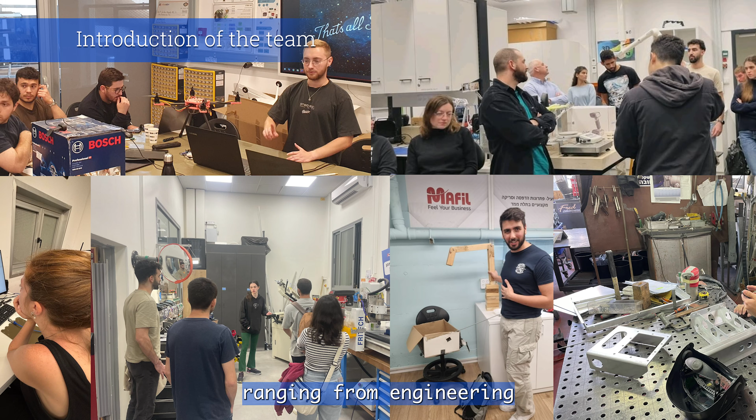This year, the team is composed of around 50 members from various degrees, ranging from engineering to applied sciences and health sciences. To work as efficiently as possible, we have divided the work between 10 subdivisions and assigned clear roles to everyone. Each subdivision is composed of a team lead and 2 to 5 team members, with a member from the industry to help with advice and guidance if needed.

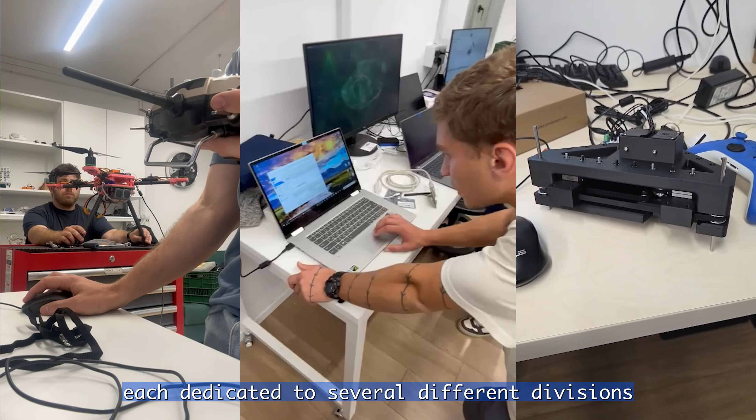Above the subdivision team leads, we have 5 system engineers, each dedicated to several different divisions and the integration of the systems as a whole. In the management side of things, we have several key members who partake in different roles such as marketing, industry relations, logistics, and more.

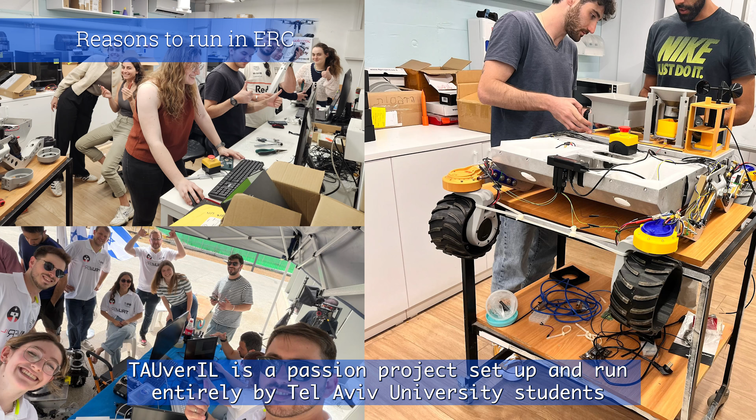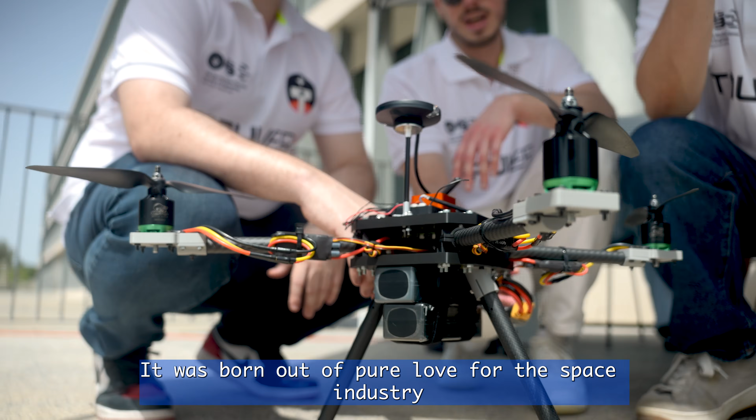TAUverIL is a passion project set up and run entirely by Tel Aviv University students as a way to grow the future generation of engineers and provide them hands-on experience during their degree. It was born out of pure love for the space industry and a passion to promote it in Israeli academia. Our close relations with both the industry and academia provide our students a way to launch their future careers with built-in knowledge. We chose the ERC specifically as we aim high.

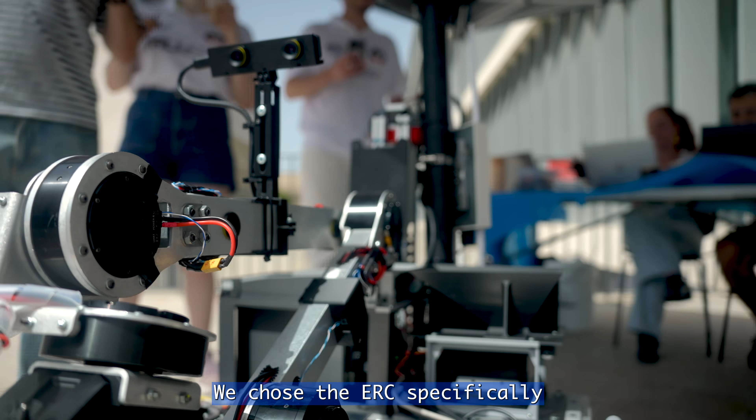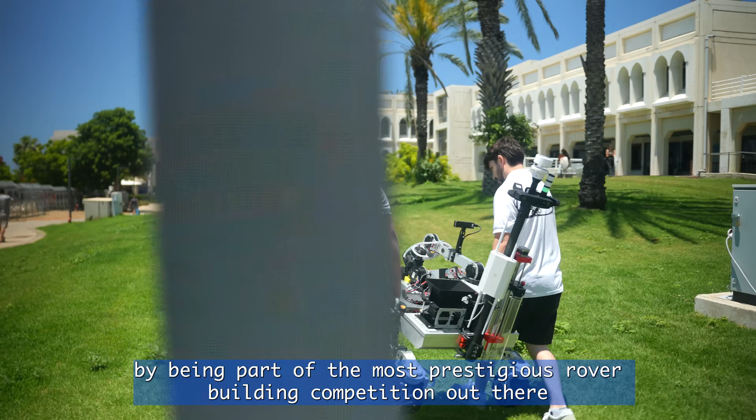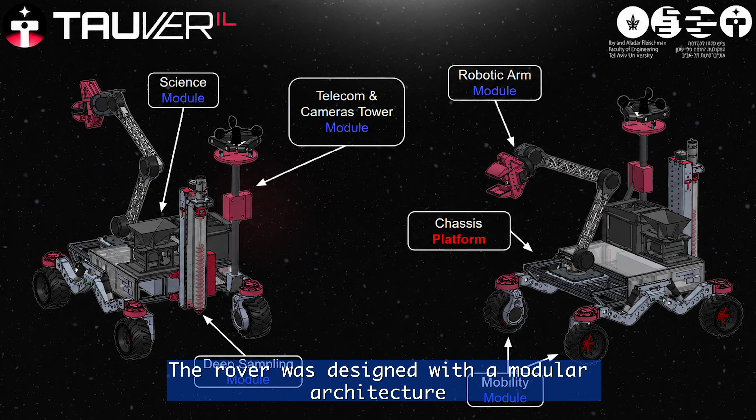The rover was designed with a modular architecture based on a main chassis platform with replaceable modules, where each module is a subsystem by itself. This allows us to change configurations between missions and also upgrade the future systems without redesigning the entire rover.

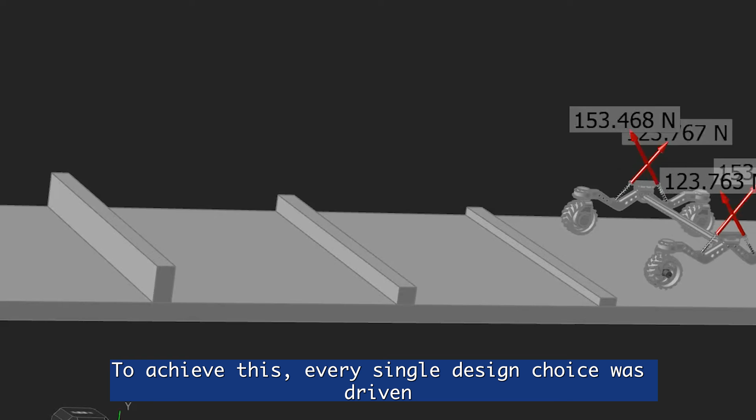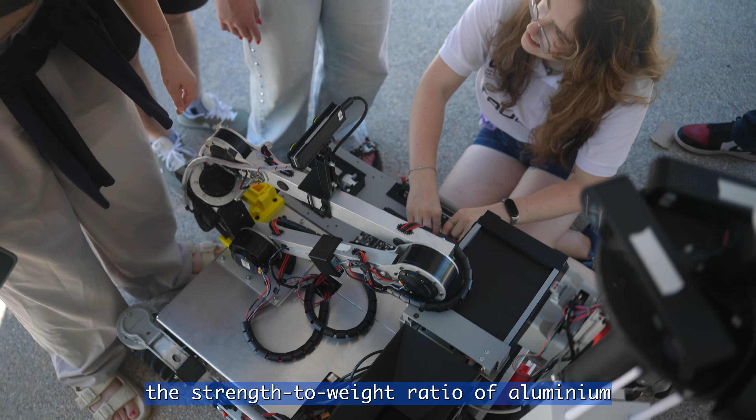Our team is responsible for 3 critical pillars: the chassis, the mobility system, and the integration of the other subsystems into a fully functional rover. To achieve this, every single design choice was driven by weight optimization and terrain traversability. For the chassis, we selected aluminum as our primary structural material. The strength to weight ratio of aluminum is perfect to shave off critical kilograms, and it has high corrosion resistance to harsh environments. For mobility, we chose to combine custom airless wheels with air shock absorbers.

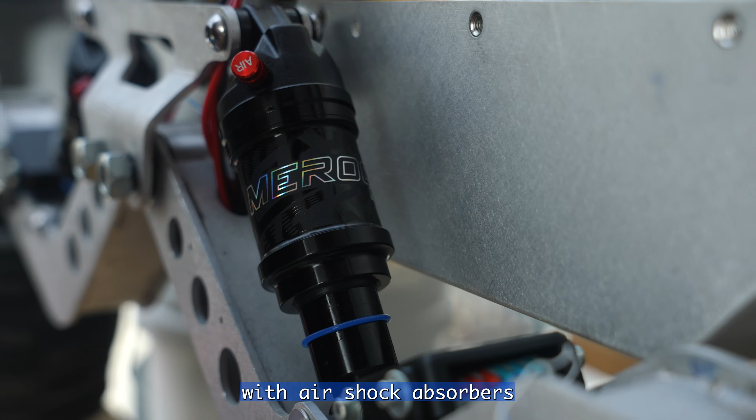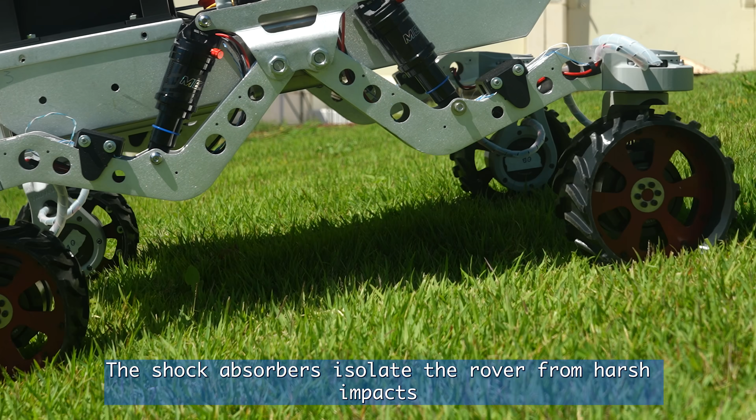Eliminating pneumatic tires reduces the risks of punctures or pressure loss on sharp or abrasive rocks while allowing the tread to compliantly deform and maximize ground traction. The shock absorbers isolate the rover from harsh impacts and keep our scientific payloads stable over uneven terrain.

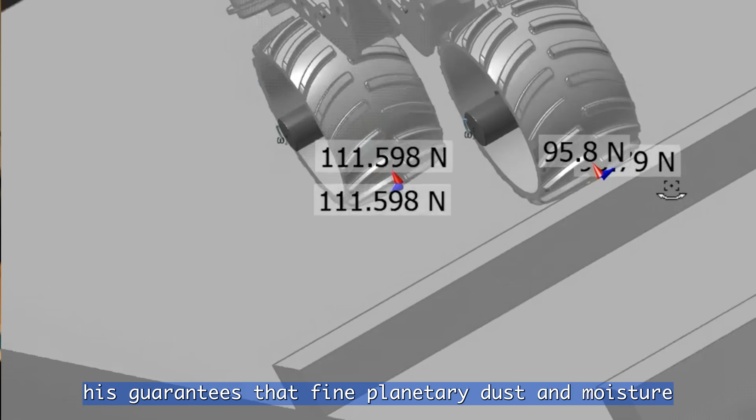For the steering, we implemented an independent 4-corner directional system. It allows for a tight turning radius, crabbing maneuvers, and unparalleled agility navigating tight boulder fields. For the actuation, we use IP-rated waterproof motors. This guarantees that fine planetary dust and moisture cannot penetrate drivetrains, ensuring total system reliability under any environmental conditions.

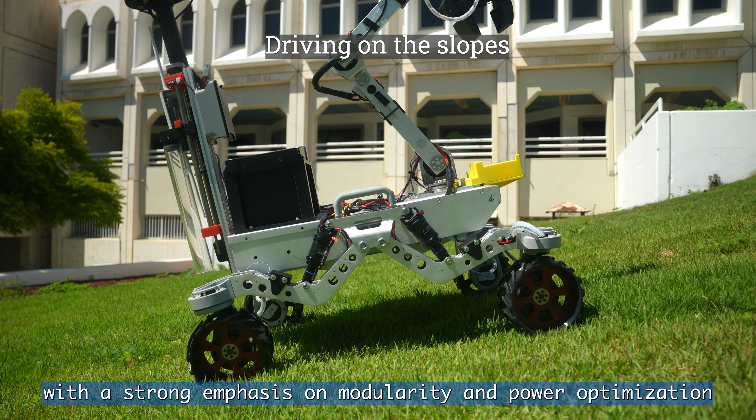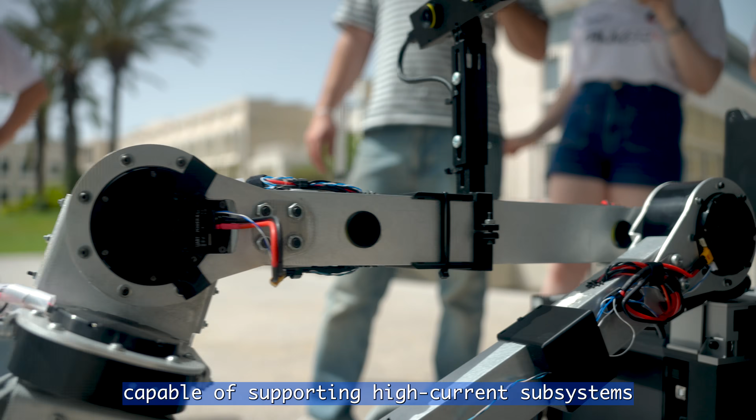This year, our primary objective was to design and develop the rover's complete electrical architecture with a strong emphasis on modularity and power optimization. The rover is powered by a custom 48-volt lithium-ion battery alongside a power distribution unit and battery management system capable of supporting high current subsystems under demanding operating conditions.

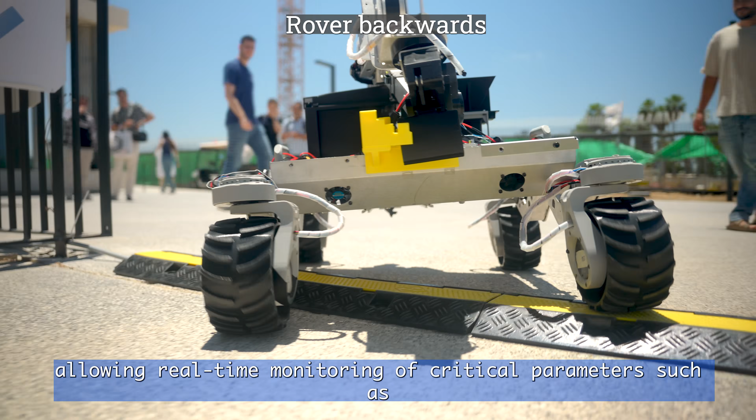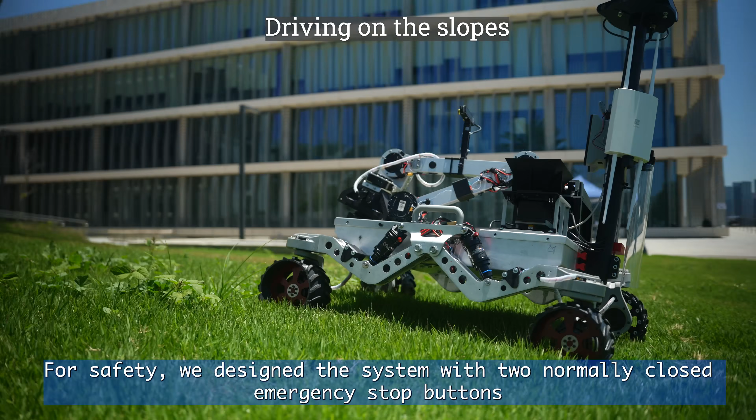To enable reliable battery monitoring and data acquisition, we integrated a CAN bus communication interface into the battery management system, allowing real-time monitoring of critical parameters such as voltage, current, temperature, and overall battery health throughout operation. For safety, we designed the system with 2 normally closed emergency stop buttons, allowing immediate power cutoff from multiple access points. We also developed a signaling system using 3 dedicated indicator lights to display different rover operational states.

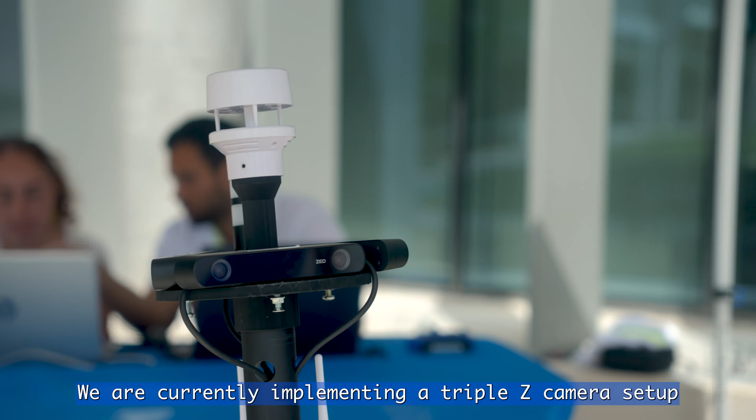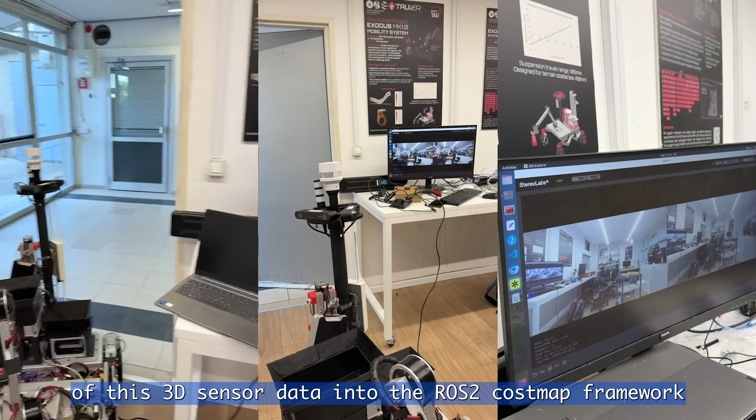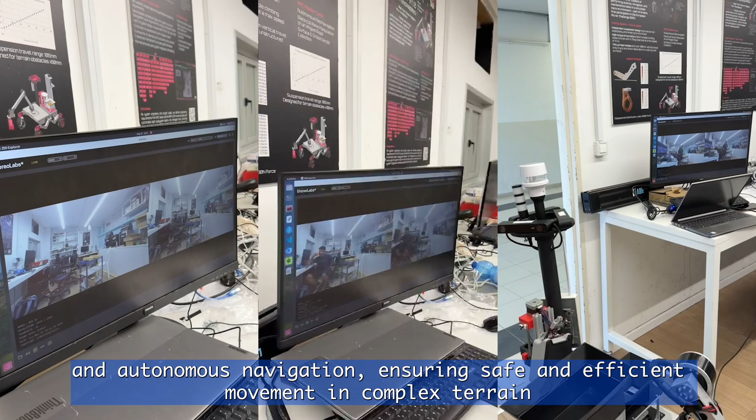Our team is responsible for developing the rover's autonomous capabilities, including localization, perception, and path planning to ensure mission execution without manual intervention. We are currently implementing a triple ZED camera setup to generate real-time point clouds for advanced environmental mapping. A key focus of our work is the direct integration of this 3D sensor data into the ROS2 costmap framework. By synchronizing these camera feeds for real-time obstacle detection and avoidance, we are building a seamless connection between computer vision and autonomous navigation, ensuring safe and efficient movement in complex terrain.

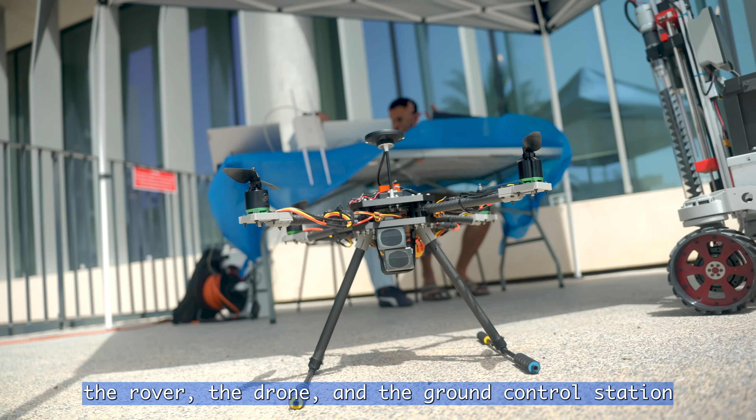The communication team is responsible for maintaining stable and continuous communication between the rover, the drone, and the ground control station. We operate across three frequency bands: 433 MHz, 2.4 GHz, and 5 GHz.

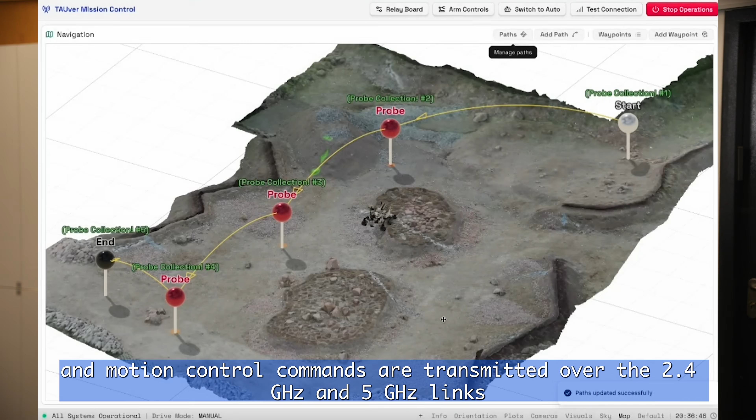During mission operations, telemetry data and emergency commands are transmitted over the 433 MHz link, while video streams, sensor data, and motion control commands are transmitted over the 2.4 GHz and the 5 GHz links.

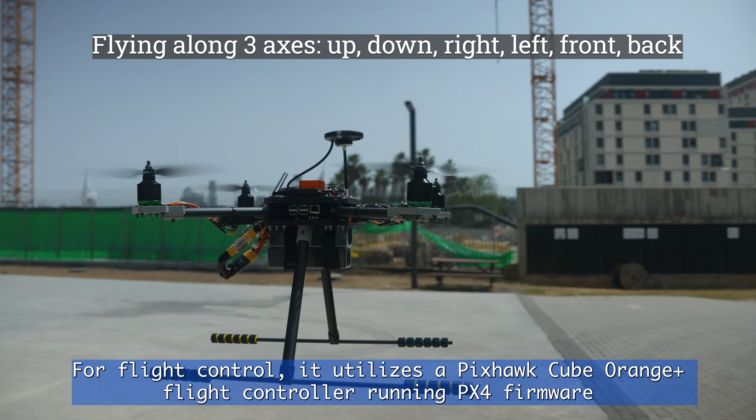Our drone is a custom quadcopter powered by a reliable dual 3S LiPo battery setup, including 4 carbon arms and 2 carbon landing pads. For flight control, it utilizes a Pixhawk Cube Orange Plus flight controller running PX4 firmware, which seamlessly enables both automatic takeoff and precision landing.

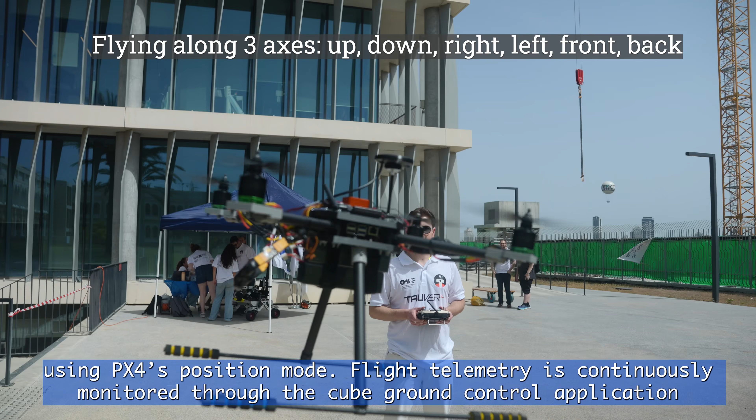The drone can move freely in all directions and achieves highly stable hovering using PX4's position mode. Flight telemetry is continuously monitored through the QGroundControl application. This provides a unified interface that perfectly bridges our ground station computer with the RC inputs.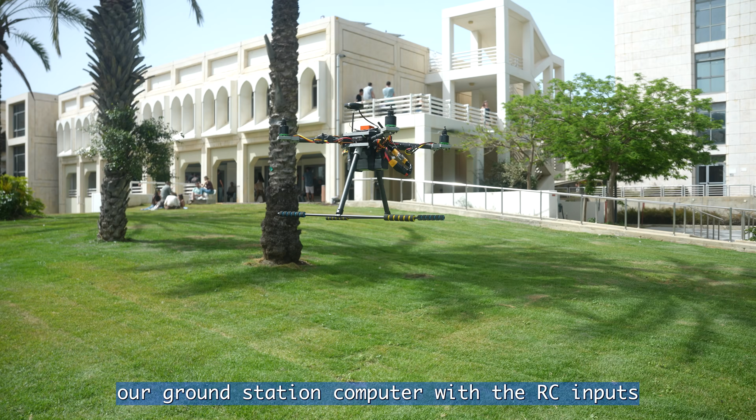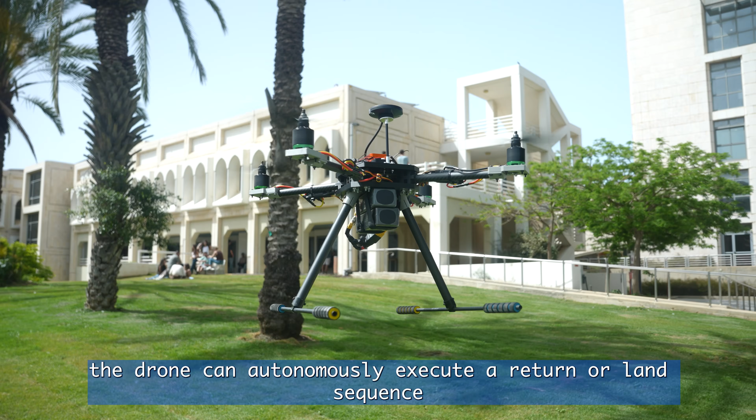Safety is deeply integrated into our system architecture. A strict virtual geofence is enabled to constrain the flight area. In events such as data link loss, the drone can autonomously execute a return or land sequence.

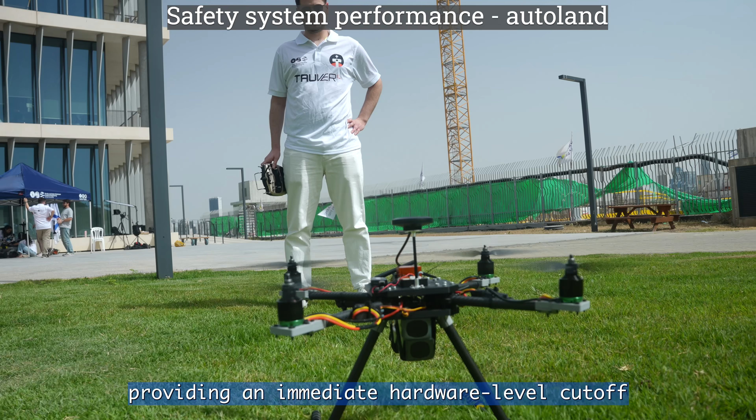Additionally, to maximize on-site safety, a physical safety switch is mounted directly on the drone's body, providing an immediate hardware-level cutoff. Above all, our system guarantees that the operator can immediately switch to manual flight via a dedicated RC control switch whenever necessary.

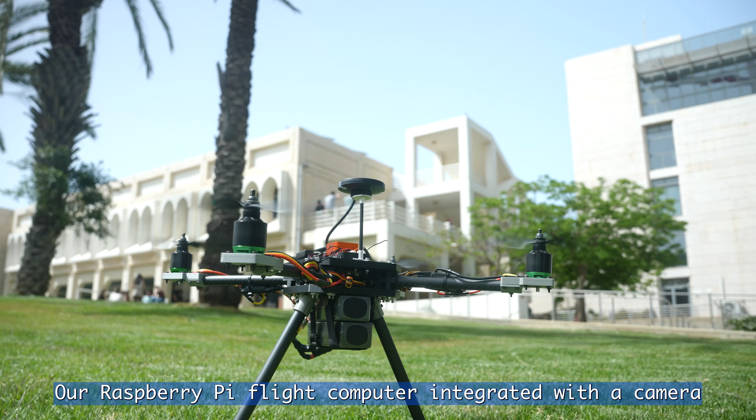Our Raspberry Pi flight computer integrated with a camera will allow the drone to execute fully autonomous flights from takeoff to landing. This system will rely on advanced image processing for real-time object detection and spatial localization.

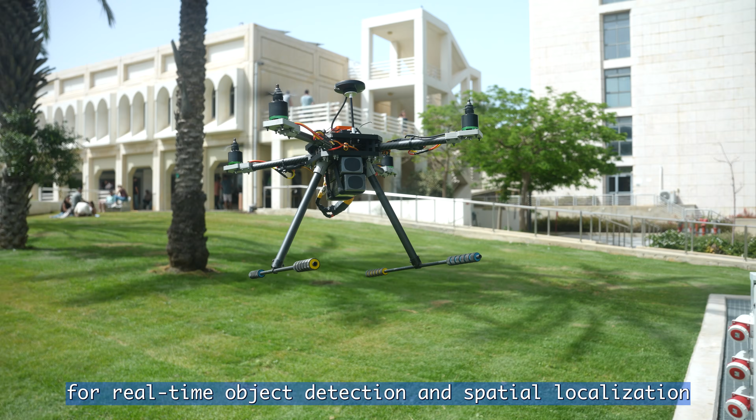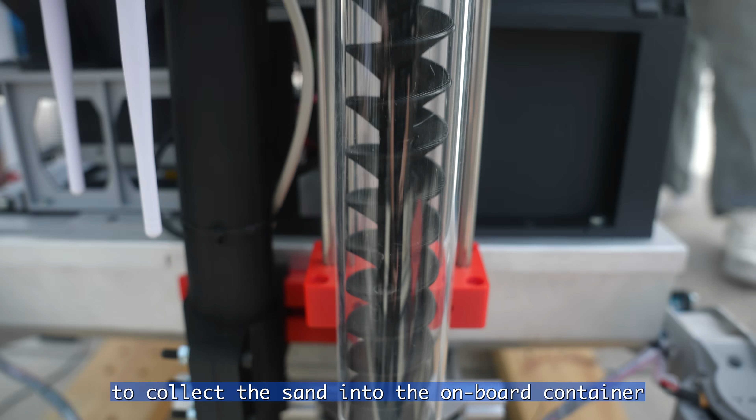Our role in the Mars mission is to collect a subsurface sample of at least 100 grams that reaches a depth of at least 30 centimeters. The system contains an Archimedes screw that collects the sand into the onboard container. The screw is lowered to the surface using a NEMA stepper motor and a lead screw. Both the DC and stepper motors have their own respective drivers to ensure that we stay in control of the drilling process in its entirety.

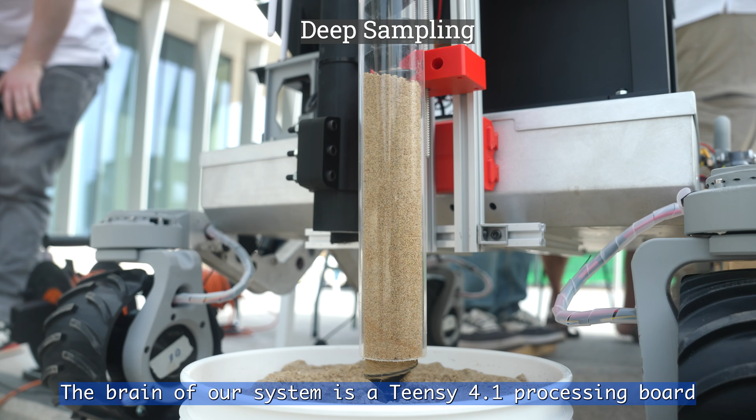The brain of our system is a Teensy 4.1 processing board along with drivers, 2 load cells to weigh our sample and to ensure that it's sufficient, a laser distance sensor to certify we start drilling at the correct height, and a camera to document before and after the drilling process.

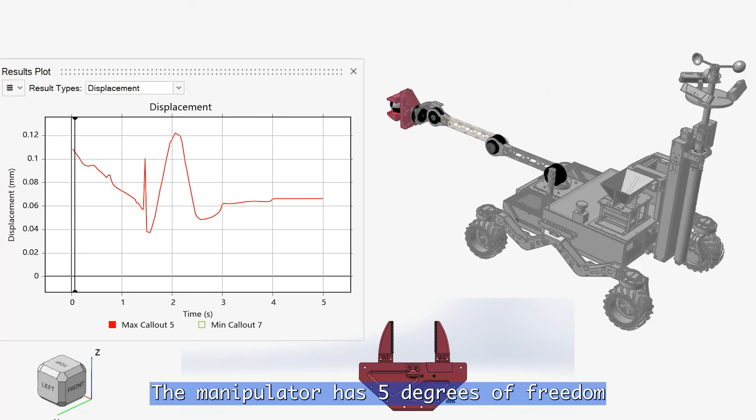Our mechanical manipulator is designed to support the rover in several ERC mission requirements, with a main focus on the science task while also preparing for the maintenance task and the probing task. The manipulator has 5 degrees of freedom, which gives us a good balance between reach, flexibility, and mechanical simplicity. We designed it to be lightweight, reliable, and easy to maintain in field conditions.

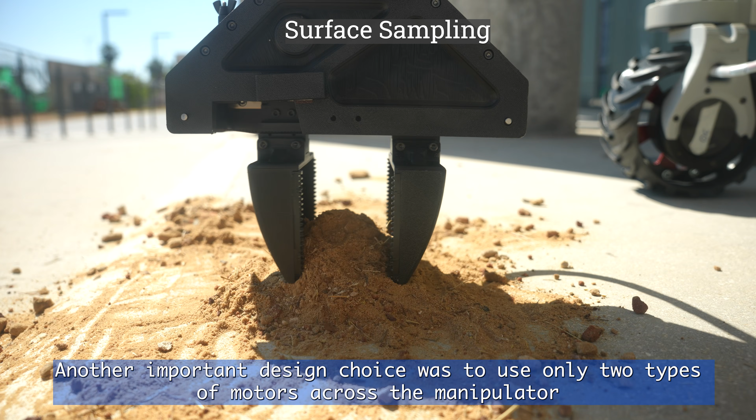Another important design choice was to use only 2 types of motors across the manipulator. One of these motor types is also used by the mobility team for the rover wheels, which improves redundancy, simplifies spare part management, and makes maintenance easier during the competition.

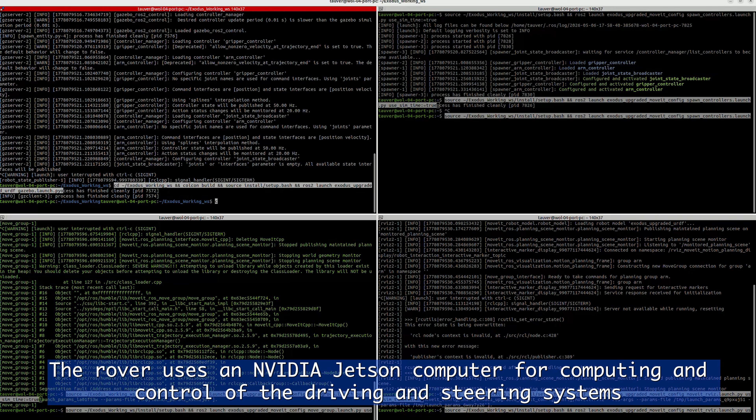As the control team lead, I was responsible for both driving control and robotic arm control systems. The rover uses an NVIDIA Jetson computer for computing and control of the driving and steering systems, with ROS-based software architecture and a CAN bus communication with the motors. The operator controls the rover using a joystick for precise and intuitive driving.

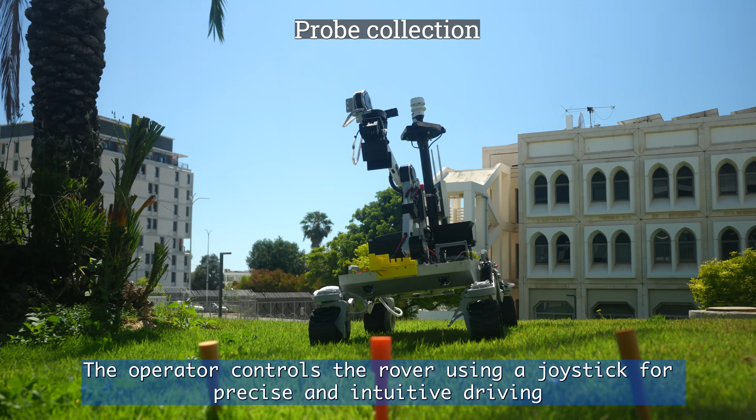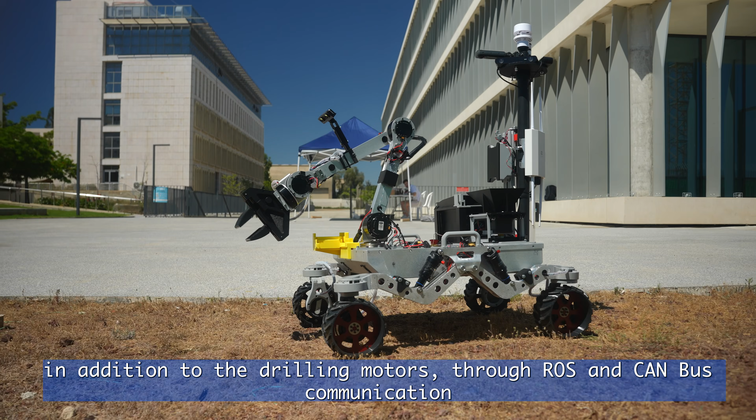For the robotic arm, we use a dedicated NVIDIA Jetson computer responsible for the arm and drilling systems. The system controls 14 motors in addition to the drilling motors through ROS and CAN bus communication. We also use MoveIt for inverse kinematics and motion planning. The arm can operate manually with joystick or perform semi-autonomous tasks using camera-based image processing for science and maintenance operations while maintaining smooth and precise movement.

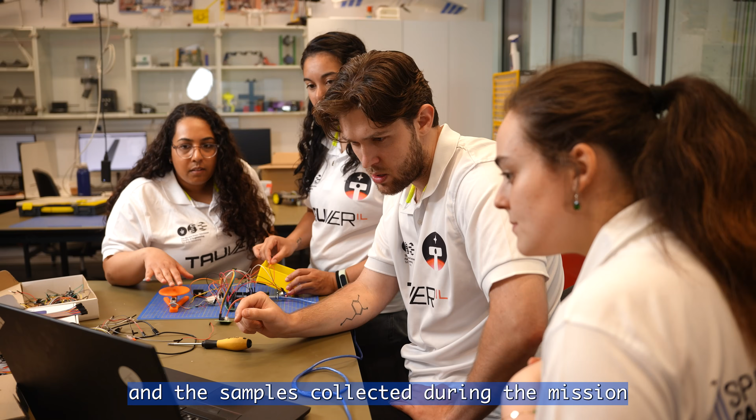The role of the science team is to design, operate, and interpret the scientific systems on the rover in order to investigate both the Martian environment and the samples collected during the mission. The science system is responsible for acquiring, storing, and analyzing multiple types of samples. These include surface regolith and rock collected by the mechanical arm, as well as subsurface material extracted by the drill module.

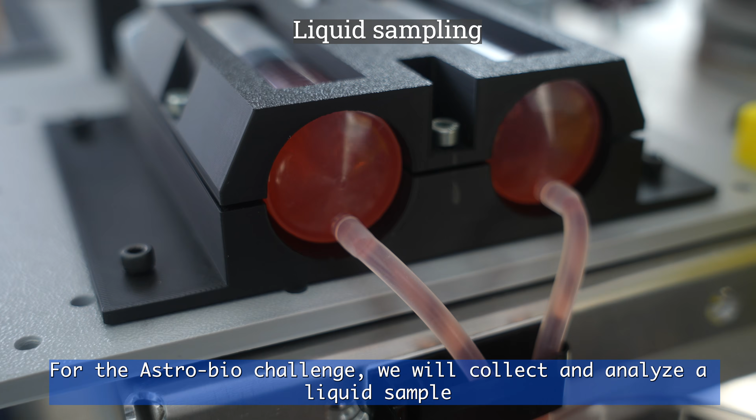For the Astro-bio challenge, we will collect and analyze a liquid sample to simulate the chemical analysis under Martian mission constraints. Once the samples are secured, we perform a series of quantitative measurements. Solid samples are weighed to determine mass consistency and material properties, while liquid samples undergo chemical analysis such as pH measurement.

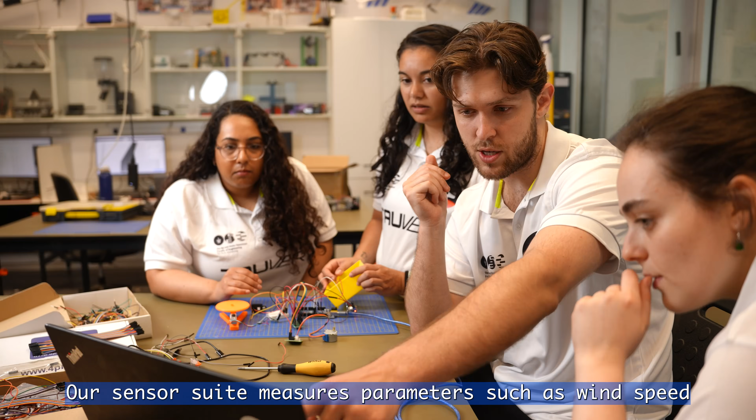In addition to sample analysis, the science team continuously monitors environmental conditions within the Mars yard. Our sensor suite measures parameters such as wind speed, humidity, methane concentration, CO2 level, and additional atmospheric indicators relevant to the planetary science and mission safety. All sensor data is logged and analyzed, and then used to validate or refute our hypothesis in the science planning report.